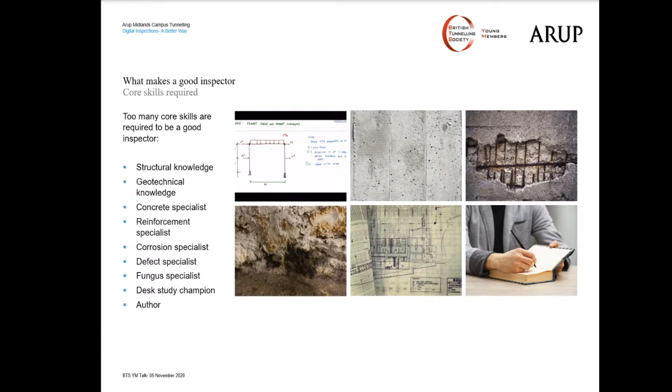It's also important for us to understand confined spaces and the regulations we have to work within. On the slide after this, it'll become quite clear why we really should be focusing on some of these digital techniques, not just from a quality of work point of view, but from a safety point of view too. So anybody in the tunneling industry really should start reading the confined space regulations. It's not the most thrilling read, but it's something which really governs us day to day and what we do.

New tunnels, you design tunnels to be safe. You've got BS 6164, you've got other standards to follow, but existing tunnels can be very old, 1900s constructed, even pre-1900. So the safety systems which we would expect today are not present, so you do have to manage them differently.

You've got dust, you've got noise, you've got obstructions. These can be a hazard for us there. People do get prosecuted under the confined space regulations.

Before the talk, I did a quick search to see recent prosecutions, and there's an interesting one for a plumber. A plumber doesn't sound that relevant for a tunnel, but he was plumbing some flats in Wales, and there was no ventilation. He brought inside a waterproofing chemical and passed out because the chemical made the atmosphere toxic, and he couldn't breathe because of the lack of ventilation. So even areas you don't expect to be confined spaces can become confined spaces. And that's something I think really important for us to appreciate as we do our work.

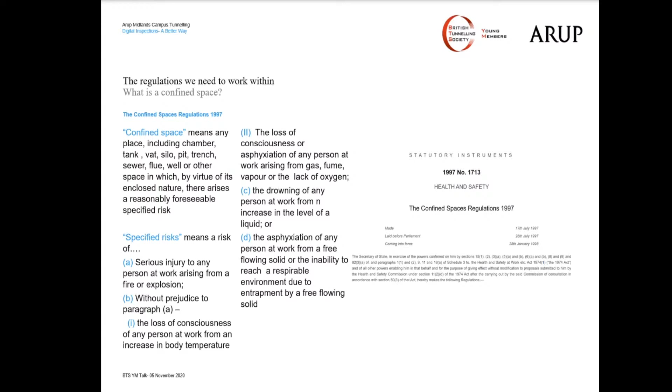If you do next slide, please, James. And this is where the digital side starts to come in. So within the regulation, we do have Article 4, prohibit the entry into a confined space for the purpose of carrying out work where it is reasonably practical to carry out the work by other means. So you do have a duty, and everybody has a duty. You as the engineer, your employer sending you in, and the asset owner, the client who owns the asset, to work towards this regulation. And so we do have a duty to at least look to see if there are other methods we could use to inspect, or just to do the works in the tunnel or confined space.

And with regulations, Health and Safety Executive does provide approved code of practice documents, ACOPs. And again, I think everyone should start reading ACOPs and using ACOPs a lot more on work, because they do provide a lot of very common sense guidance to go with regulations and other documents. And Article 72 of the ACOP, examples of modified working practices preventing the need for entry. So it does list a series of potential ways you can limit yourself having to go into one of these confined spaces. And I've picked out Article D and Article E. Article D, use of CCTV, and Article E, remote visual inspection, RVI, to carry out examinations.

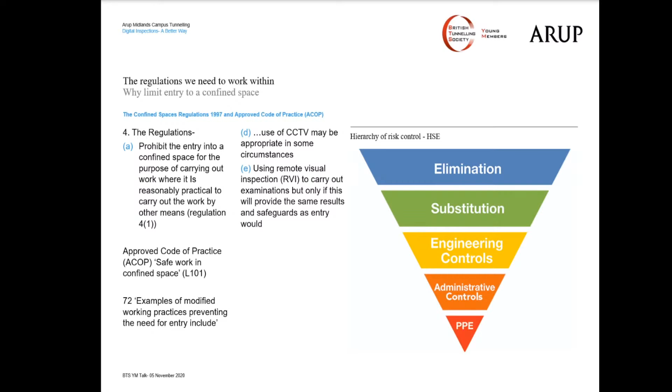Big caveat at the end of that, but only if this will provide the same results and safeguards as entry would. And that's the big hurdle I think as an industry we're coming up against, is do these techniques provide the same level as sending humans into that asset? And we'll go into a bit of that as well. But this really links to the classic hierarchy of risk control. There is a risk. You're going into a confined space. Can you eliminate it? Can you substitute it? Trying to aim for those top two. They're the key areas to try and move to. Next slide, please, James.

So can these digital techniques replace a principal inspection? Those conversations are happening at the moment. General inspection, yes, I think they can do, and they do at the moment. Principal inspection, it is a bit more tricky, but equally, Network Rail are doing funding with Innovate UK on techniques out there to enable them to do inspections of their tunnels without having to do possessions. And Highways England have had a similar idea with the Transport for London, just did a recent tender, and within the tender they were happy to open up challenges to the principal inspection requirements if people wanted to bring with them new digital techniques which would lower costs.

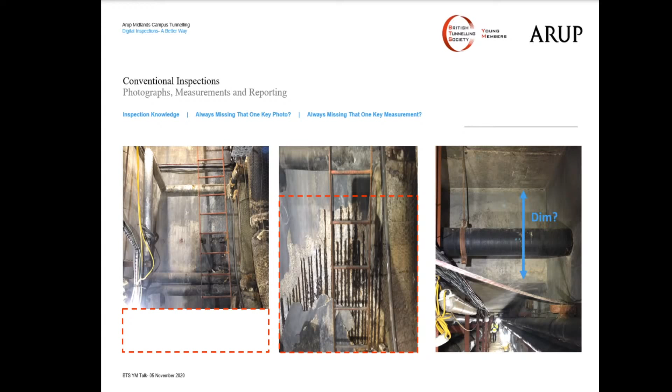So we looked at this as an approach within Arup, and we attempted to make this process a little bit more streamlined, a little bit more efficient, and we wanted to really deliver a high quality inspection and reporting method that was really easy for somebody to pick up. Now, the only way in our minds to do so is to throw out the rulebook and start from scratch. So let's do a little bit of research.

So the future of inspections was a little bit of a clickbaity title, I will admit, but we do have a lot of emerging and proven technology at our fingertips, and we pretty much decided to try out everything on a variety of different projects to try and see what stuck. Now, the first of two systems we'll go through here are point cloud systems, the one on the left being a handheld LiDAR and the one on the right being a static LiDAR system.

So first of all, the handheld system on the left-hand side is relatively impressive, actually. I was really impressed with this when we saw it on site. The picture you see is actually taken by myself looking at the iPad that was being live fed the data from a handheld device. This can actually determine where it is using something called SLAM technology. Now, SLAM is just a buzzword, if you will, for looking at a sufficiently different point and determining where it is based on the picture it had previously.

So it's quite important here to start with a sufficiently detailed or complex bit of the geometry. We chose the corner on the right-hand side to start our scan. And a scan of this type is used for a really quick, like a low poly, a really simple shape style scanning. And it's really useful if you don't know the general size or the shape of your asset, or if the point density is relatively low as well, to enable a bit of real-time feedback to the iPad that you can see. And you can gain general obstruction.

So the cables on the left-hand side of the picture, the freshwater pipe, the red pipe at the ceiling as well, you can kind of get, but the detail really is lost here. Advantage being it takes about 5 minutes to scan 100 meters of tunnel. Now, the second option on the right-hand side is a more conventional static LiDAR system. This can actually be set to different point cloud densities. This is the main system that we've landed on, and we will see this throughout the presentation with the 3D models that we produce at Arup.

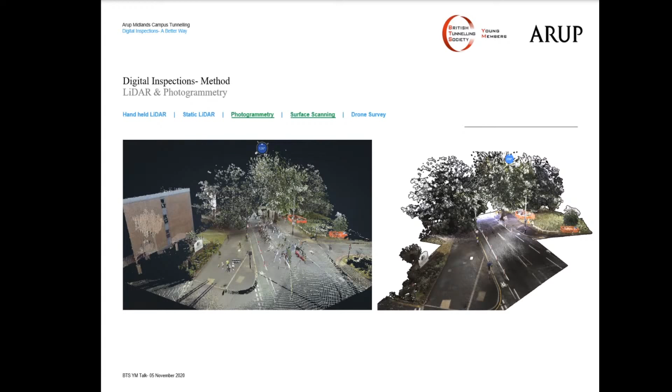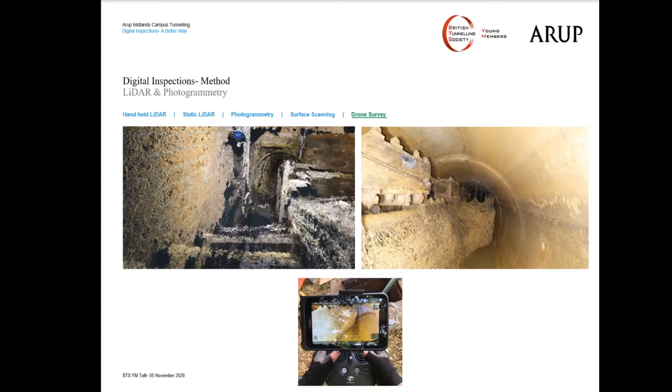The image on the left-hand side was actually a photogrammetry model produced by the drone as it flew through. The drone came through at quite a pace, and just a little bit of post-processing created a full point cloud model for us to scale off. Again, not in engineering terms, but it did give us an idea of measurements we had absolutely no business having - dimensions from the other side of these cable trays that were really important to the contractor at the time. It really reduced time on site for them at a later date. So a big win for us.

So as promised, we're going to go through two case studies. The first one here being London Power Tunnels 1 decommissioning. After the second London Power Tunnels cable tunnel system was installed, they're getting ready to decommission the old cable network and remove it from the system.

This actually gave us a really good opportunity to be able to interlink all these different scans together and track the HV cables that came from outside of scope all the way through the tunnels, up through the floor slab and into one of the HV buildings.

The full 3D stitched model did act very seamlessly because it was all taken with the same scan system, which we'll come on to in a little bit. We found that the cables were actually labeled incorrectly in one case by the contractor, which is a huge benefit. We could show that cable passing straight through the floor slab and up into one of the systems, and we relabeled that for them directly.

As Will talked about earlier, we can reduce the amount of people on site. So we require only a skeleton inspection team taking the data asset. We can capture the data and complete multiple technical, CDM, and other reviews in the safety of the office using VR headsets and 3D models, immersive technology.

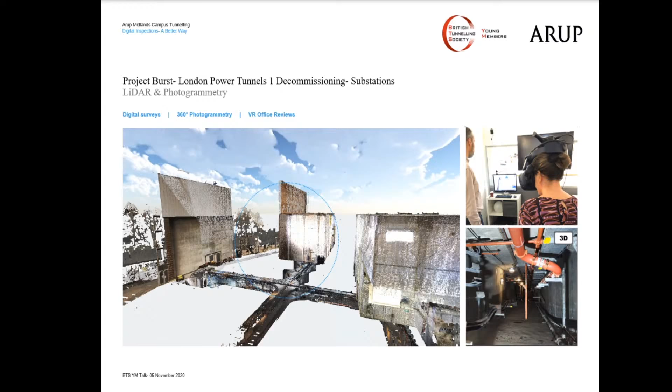We actually used the models as our notebook in these meetings. We tagged data, defects, CDM observations directly into these 3D models during our technical reviews. You can see the bits highlighted in yellow and the white text callouts are all the different observations we made. This actually saves automatically to the cloud.

It's backed up on our own servers, so anybody with responsibilities within the project can access the data at any time. It even gets pushed to the client directly so they can see it in real time as we're making the observations. You can click directly onto a defect or an observation in this model, say the orange section just here, and you'll be able to have that exact view that whoever made the observation had, seeing it from their exact perspective as the identifier.

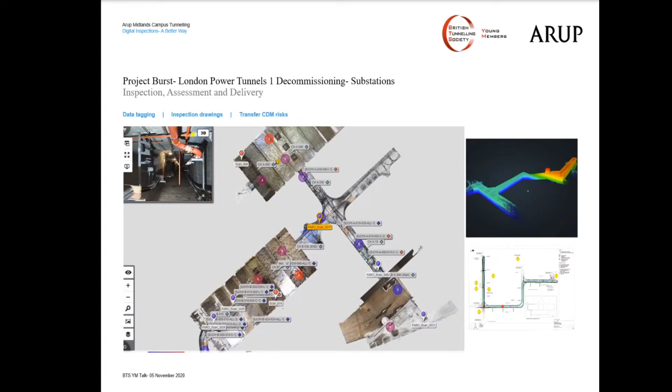So this is actually the 3D model we created into a 2D PDF. We used this to create some conventional plan drawings, with CDM hazards and defect IDs already labeled on. At this stage, because it was our flagship project, one of our first ones, we actually generated a manual task for this project. We didn't have our digital workflow set up at the time, but it was still a lot quicker than doing everything manually.

So we did have some reference points in here, so there are some advantages even if you don't have your full workflow set up, just to get ready. It may be too zoomed out on the right-hand plan view just here, but you can actually capture sections directly from the model we captured here in the outline, and we dropped it straight onto the PDF. This allows the engineer to be quite seamless with the CAD technician and the BIM technician as well, at the same time, which is a huge advantage for us.

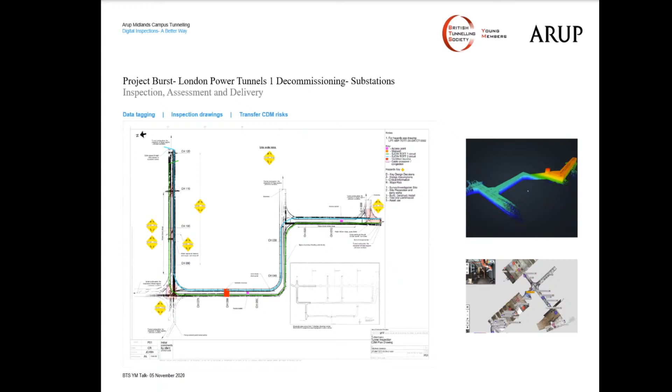It's also really simple and easy to read for the reader, so the client and the contractor in this case, we were on site at the same time. People are down inside a tunnel in the dirt and darkness, not a lot of lighting going on there. You don't have to see on the notes page, see drawing X for this, see drawing Y for that. It's all contained on one set of drawings. You know exactly where you are within the tunnel.

This was another really cool tool we used: creation of elevation plots for the tunnel labyrinths below another substation I didn't show previously. They're really useful for labyrinths and arrays. We transferred understanding of these different aspects by taking this snippet and turning it into a 3D PDF, allowing the client and contractor to have a risk review meeting on their processes. It's really simple and easy to use, could be manipulated directly by people in meetings with no CAD or model experience whatsoever. This has gone down really well with the client.

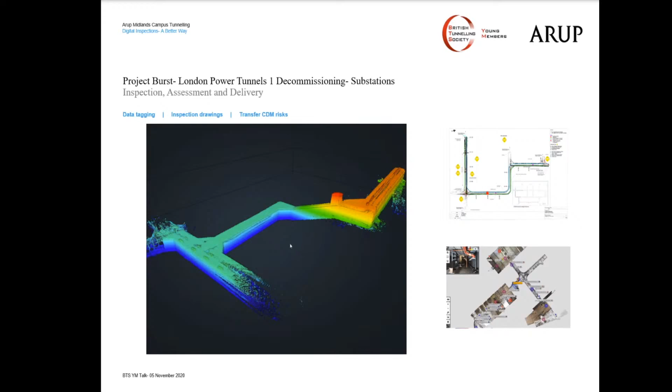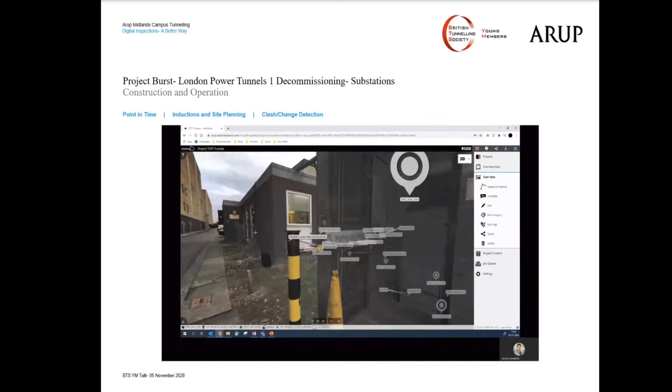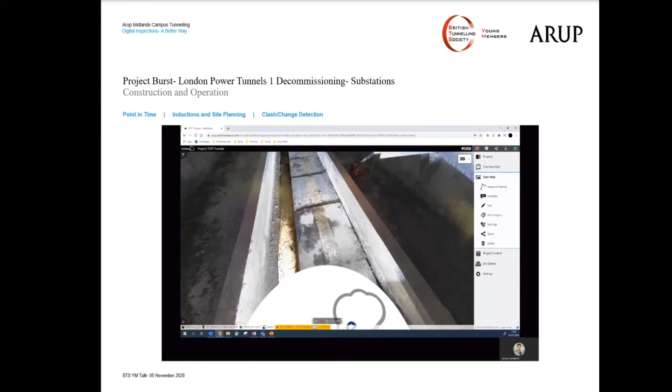The last one is just a video to show how the contractor and also the maintainer, the operations director, actually use the LiDAR scans as the asset owner themselves. It's all hosted on an Arup server, can be accessed anywhere from any device with an internet connection. You can use it on your phone, on your iPad, at home, in the office, wherever you are. You can even download the data if you want - obviously you can't see live updates, but you can download the data if you're inside the tunnel and don't have a signal, for example.

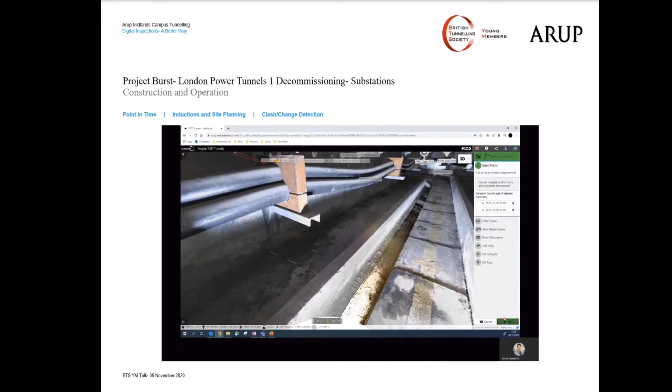Contractors have used this as a remote site induction tool prior to attending site, which is a really good use of digital inspections. It's really pertinent, especially during the pandemic, to get people out of needing to go to site for their induction.

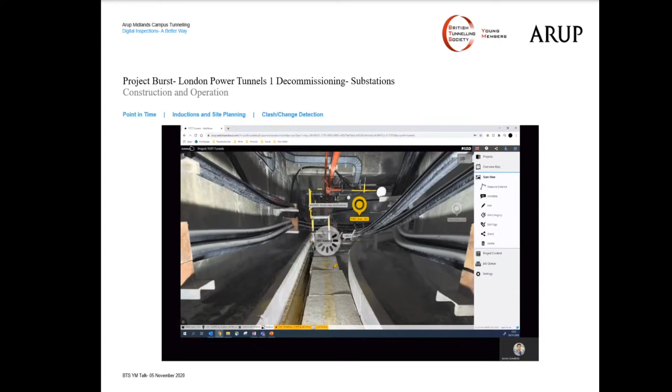As you saw there, you can click directly through to a hazard that's been previously identified. You can create your own dimensions - dimensions are already saved in there by previous inspectors. You can actively make observations yourself while walking around the site with your phone, and when you relink back up to your cloud data, you can push this back to the cloud and everybody else can see it if you've been on site.

There's also quite a lot of scope to identify clash or change detection with subsequent scans. So if you've got a bridge or tunnel that's technically failing and starting to deflect, you can monitor the failure mode. If you take multiple scans every 6 months or so, or however often you need to, you can overlay them and show change inside your LiDAR scans, which is a lot easier than trying to take measurements.

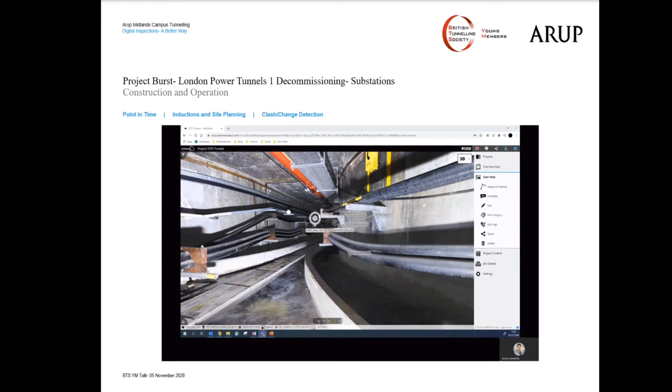The next project, number 2, is Queen Alexandra Hospital steam tunnels - these are ducting tunnels that transfer steam directly from a boiler house to the hospital. This one was really just to show that these techniques work well in linear assets too. A question we normally get is: okay, it works around labyrinths and corners, but does it work in a long line?

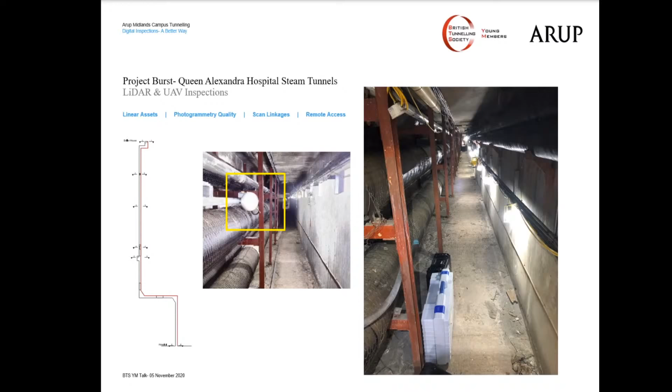I think that's all they do, but yeah, you can get up to 4K if you really need it. The next point is probably just linking data together - trying to link 2 pieces of data like this just really doesn't work. It's the same as taking your extremely detailed 3D Plaxis analytical model and trying to link it with your 1D line beam in the first instance.

The systems just either aren't compatible or are often a lot more hassle than it's worth. You don't have any key indicators with that one on the right. And this is another question we normally get: can you just use the fixed wing static LiDAR system that we've flown a drone at 1,000 feet or something previously and got this really not very detailed point cloud? Can you link it with yours? A lot of times the answer is no, because it's just not detailed enough. Sometimes yes, but a lot of times no. It's just a watch point.

So on this one here itself, Queen Alexandra Hospital, we actually used 2 different types of remote inspections. The tunnel itself was very hot. It was around about 55 degrees ambient temperature inside a steam tunnel. So people access was limited to about 5 to 10 minutes maximum before you started exhibiting signs of heat stress. So we went through a remote access inspection method instead.

On the left is the indoor UAV drone that we saw some footage from earlier. It's less than 400 millimeters in diameter. These drones in the hand of a skilled pilot, which we've seen previously on site ourselves, can actually be flown down a gap as small as a 600 millimeter pipe with water in the bottom. So it's very impressive, the small gaps that they can go through. Their range is relatively limited, but they can go up and over obstacles, and they're great at reconnaissance style flights. So range is limited to about 100 meters or so without corners.

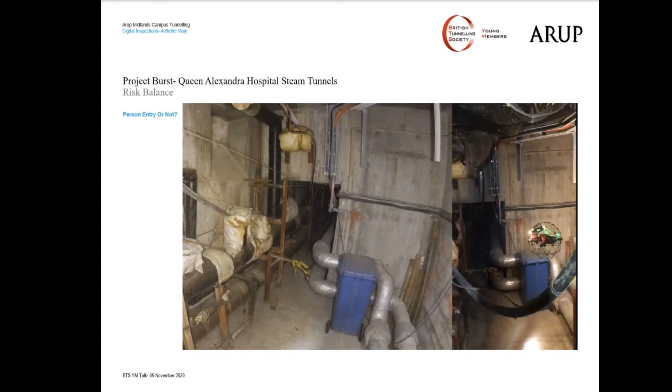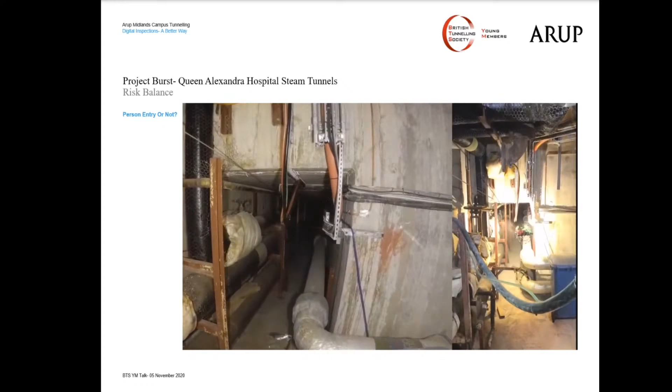And then the last aspect to balance is risk. So these are just two videos. The left one is from the drone's view and the right one is from my view. So as Will talked about earlier in the presentation, the risks are not completely eliminated with unmanned operations. The video shows that we remove the general risk of entry, and we have a permanent record, but you still have to ask yourself some questions.

So the first one, the big cables above you. The second one, entrapment risks. Can you get caught in that cabling on the left? There's stuff that can fall on top of it as you go past. There's dust. What about hot pipes? What if it runs out of battery? What if it gets stuck? The last big one is the unknown. The drone can only fly so far. So what happens if you lose your signal? These are all normal questions that people ask. I actually put out a LinkedIn post very recently, and everybody wanted the answer to these questions.

Now, the big thing is you can't tether it. It throws off the gyroscope. You can't always predict when it's going to lose signal. But what you can do is plan for these eventualities. And it's a hell of a lot less risky for a 5-minute entry to retrieve the drone in the case of an emergency, so long as you plan it appropriately beforehand, than it is to spend a 12-hour shift for 3 people inside the tunnel inspecting. So it's all a balance of risk. That's all it is. It's not elimination of risk. It's just a balance.

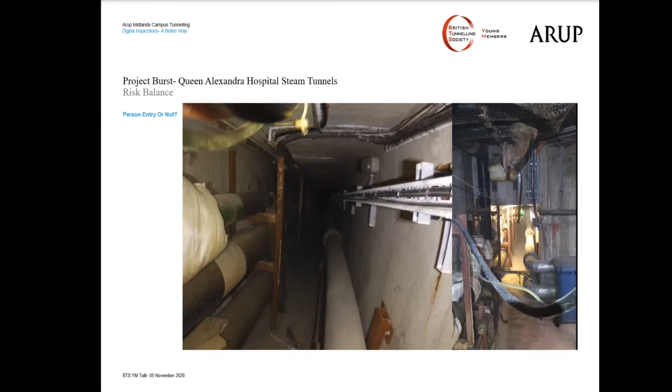And then finally, for me, there's a huge advantage with some digital workflows over recent times. As I said previously, it was a bit of a manual process. We've actually automated a lot of our deliverables now. Whilst our clients are still asking for paper drawings, I think it's very obvious that we're going to be moving to digital model delivery, as we showed with previous case studies. But people are really familiar with paper drawings. People like paper drawings. It makes it easier to approve and also to complete quality controls because people understand them, the procedures are there. So why not make the paper drawing better? Why not improve the quality of our submissions? And we can do so through a bit of automation.

So now, as we went through previously, we already had that data. We've done those technical reviews. Those reviewers have already come in and tagged exactly in the model where every single defect and every single CDM observation that they've made is. We've gone through countless 3rd, 4th, 5th reviews. So all the data's there.

Let's just drop it directly onto a drawing border. And all we have to do is upload those pictures directly to the cloud that's taken as part of your 3D immersive model, and it drops exactly in the right position for us, already annotated and already labeled. This just takes a few little quirky minor scripts, and you're right there.

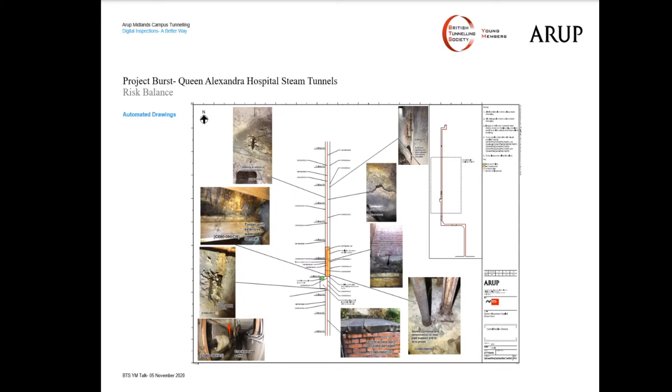So I'll hand back over to Will. I'll clear up the rest of the slides. Thanks, James.

That's really good. So it's two more slides actually, and it's just thinking about what is next with some of these. The digital aspects of inspection, and James did mention it. Some of the contractors did come back and say, "We saw you scanning the tunnel. We want to do some works in that tunnel in the future. Can we use your model now?"

They've done their risk assessment method statement within the model and then used it as an induction tool. And just like James said, COVID happened to occur whilst we had some of this data available, and so the contractors were able to get their teams inducted remotely using the information captured. So it does have these hidden benefits for the future as well.

I've put the scary word there, digital twin, and none of the stuff we're looking at here is a digital twin, but it's the idea that as you're collecting this data, you are enabling multiple teams to look in that common data environment. You've got the defects, the M&E teams will come and start tagging in their pipelines, and then they may want to ask about installing a new pipe, a new electric cable, and they'll start using the model to input their data. So we're starting to step towards that common data environment, which is great, to be honest with you.

And it's one of those steps towards the higher BIM maturity levels. We have had questions about, can we tag the light bulbs with different types: this one's 100 watt, it needs to change in X many years time, which is coming on to 6D BIM. Ironically, I'm skipping all the other steps, but it is an enabler for these higher levels, which I think is something we do need to be pushing, and capturing the data enables the clients, the contractors, the consultants to have that data to move and work on.